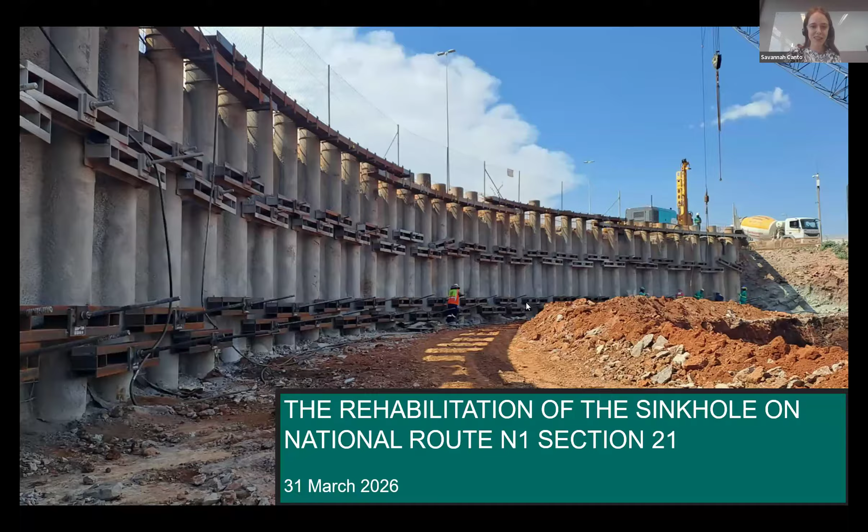Thank you. Morning everyone, and happy World Engineering Day and month. Today my colleague Anemi and I will be presenting on an interesting project that we were part of: the rehabilitation of the sinkhole on the N1. We'll go through the background and design solution for the project, then take everyone through the construction process and describe how incorporating technology led to a very efficient design and construction process.

First and foremost, we'd like to acknowledge and thank everyone involved in making this project a success. Firstly, our client, SANRAL, thank you for the opportunity to work on this project. Then to the design and site supervision teams at Zutari, as well as the contractor, Jordan Construction, and the geotechnical subcontractor, Terra Strata. A huge thank you to CESA for letting us present today, and to the CESA Aon Engineering Excellence Awards for selecting our project and providing a wonderful platform for consultants to showcase their projects.

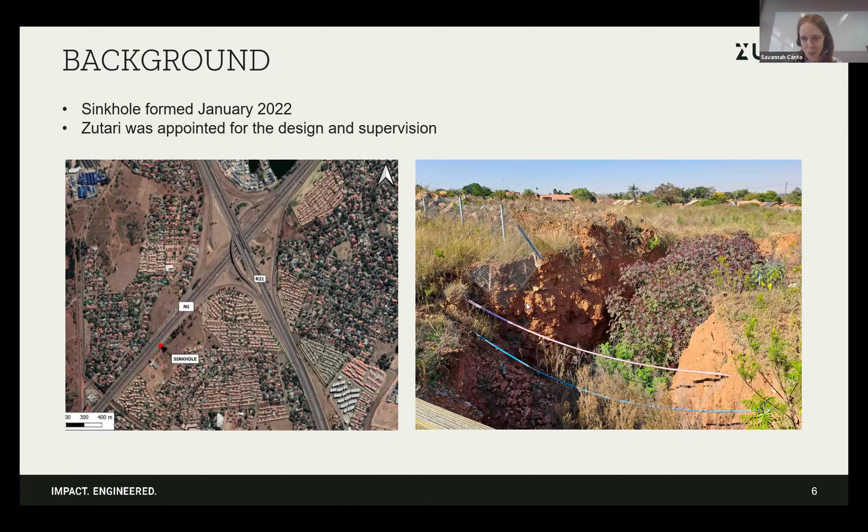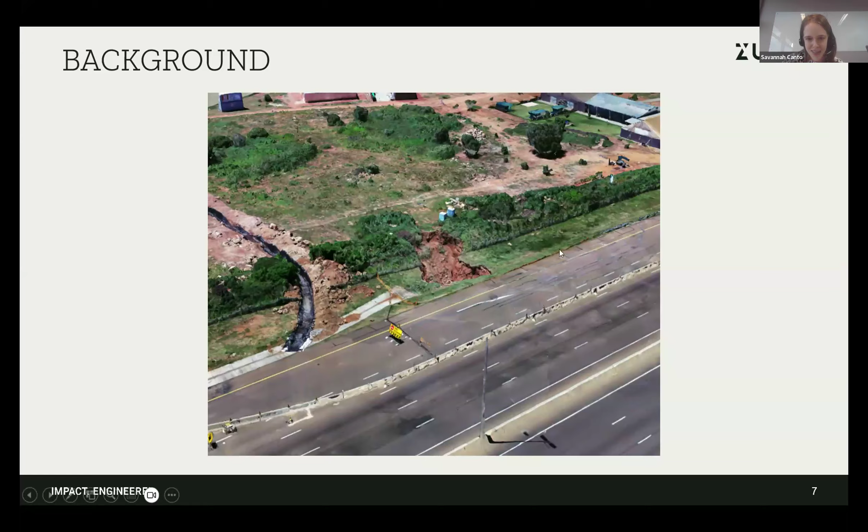Firstly, some background on the formation of the sinkhole. It formed in January 2022, just after the Flying Saucer Interchange on the verge of the N1. Zutari was responsible for the design and supervision of a remediation solution. This shows some drone imagery of the sinkhole, and you can also see the wider crack pattern around it. Here are more images of the crack pattern surrounding the sinkhole on the inner two or three lanes of the highway.

We started with an initial geotechnical investigation to find out more about the ground conditions surrounding the sinkhole. Those mounds on the road are where percussion boreholes were drilled to obtain more information on the ground conditions. These showed very poor subsurface conditions with a lot of cavity areas. One thing was that we couldn't do any excavation or investigation too close to the sinkhole because it wasn't safe to access at this stage, so our investigation was limited to the surrounding area that we could access.

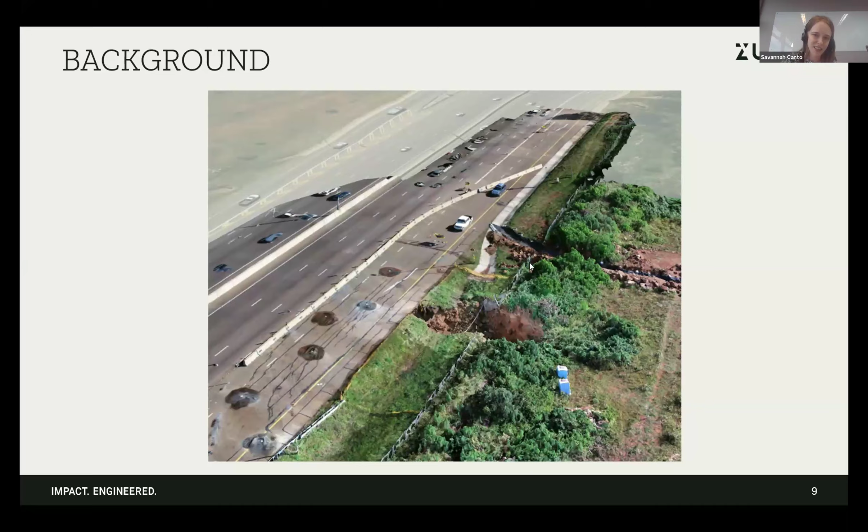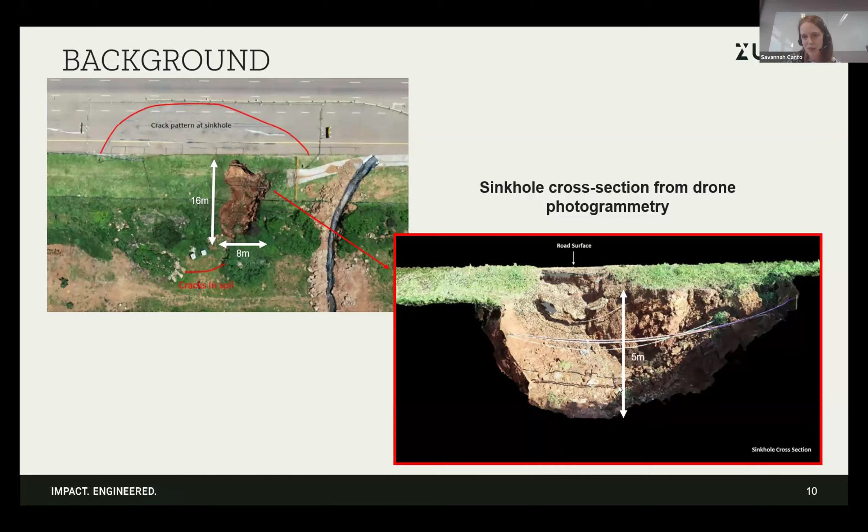Between Centurion and along the N1 and R21 route, there's a lot of dolomitic terrain. This is showing the location of the sinkhole in terms of the dolomitic geology in the area. The dolomite is all the blue on the map.

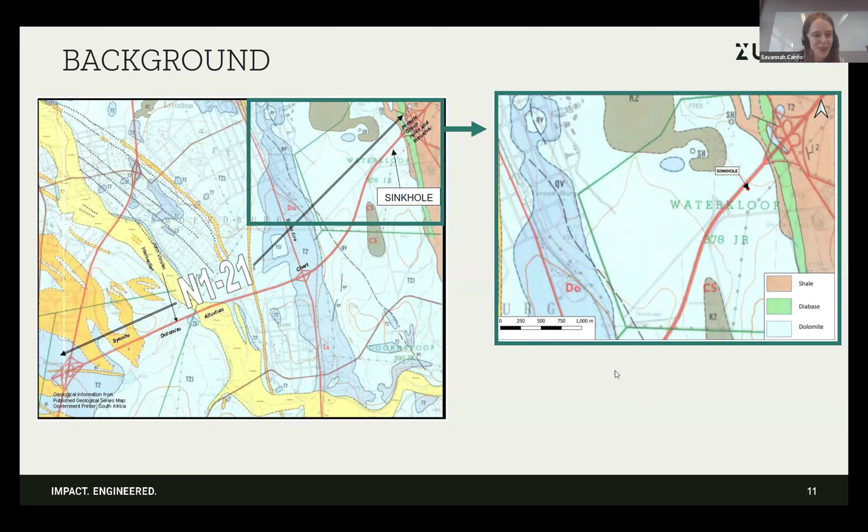This is just a brief introduction to sinkhole formation. They are formed on dolomitic terrain. What happens is that over many years, there will be cavities forming within the dolomitic bedrock due to dissolution of the dolomite from factors such as acid rain.

These cavities sometimes remain stable beneath the earth, but when there's a change, for example from lowering the water table and a pipe leaking or some leakage at the top that causes the fines above to wash into the cavernous areas, then the bridge of stable soil above basically gets eaten away at until it can no longer support the loads above, and then a sinkhole will form.

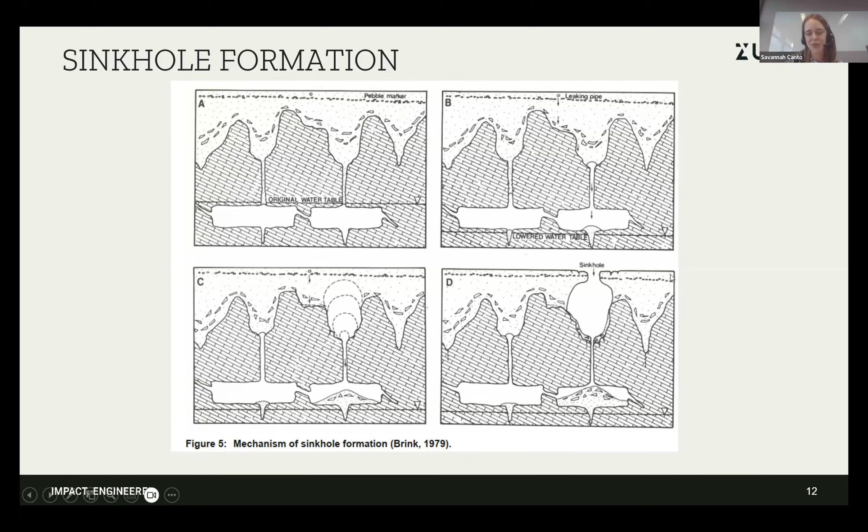So onto the design solution. There were basically two main solutions considered, or two aspects that were targeted. Firstly, we had to repair the immediate area of the sinkhole.

To do that, we needed to use a vertical retaining wall because it was important that the road remained open to traffic, and a full closure of the N1 would not have been economically feasible. So in order to keep some of the lanes running and save space, we couldn't do a battered excavation, and therefore we needed a vertical excavation.

The only way to achieve that was to install a piled wall surrounding the sinkhole, and then to excavate the sinkhole area and then plug the throat of the sinkhole.

That would involve drilling boreholes, which we chose to about 30 meters depth, and then pumping in a compaction grout mixture under pressure along each meter of that borehole to fill any voids or cavities underneath the highway.

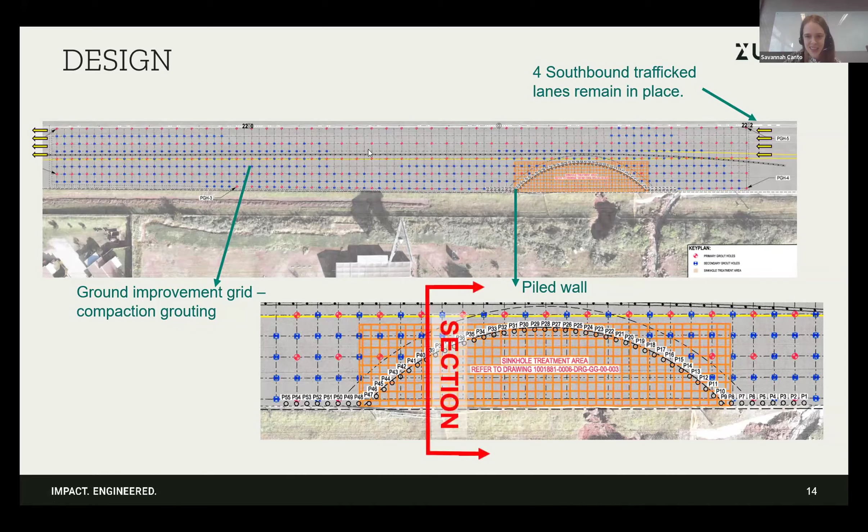The next slide will show a section through this piled wall. So here we can see a section through the piled wall.

For the piles, we used Odex piles. They're steel piles with a casing of 12 millimeters. These were selected because the dolomitic geology is very variable.

It's variable in terms of the depth to bedrock. The bedrock profile is very variable, and there will also be large boulders of dolomite, sometimes loose within the residuum, that need to be drilled through.

So the retaining wall was formed of these Odex piles that were installed to a depth of 25 meters. And then lateral support in terms of self-drilling ground anchors were used to keep the wall in place.

This allowed us to excavate in stages the sinkhole area. So how it would work is the piles were installed and then a row of anchors was installed with each excavated layer.

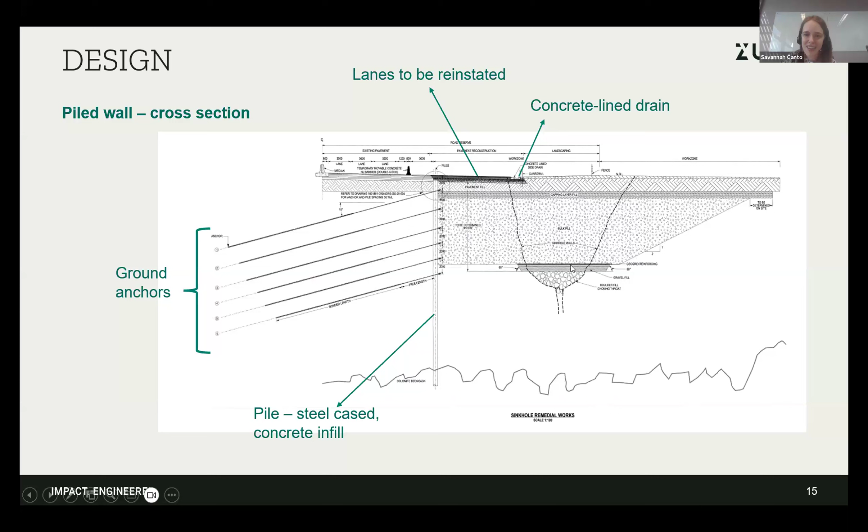Because of some safety concerns and more information that we received on the ground conditions while we were excavating, we deviated from the standard inverted filter method to repair the sinkhole and instead compaction grouted from within the excavation, which I'll explain in the construction slides.

And now over to Annemie to explain some of the traffic accommodation and pavement aspects.

Thank you, Savannah. So on the pavement slide, the roadworks involved the reconstruction of approximately 97 meters of primary pavement area, shown there in orange in the image, which had been significantly damaged by the sinkhole.

The excavations required for the sinkhole rehabilitation is indicated with that yellow hatched area. The primary objective in this zone was to remediate the sinkhole and provide structural support to the road throughout the construction process.

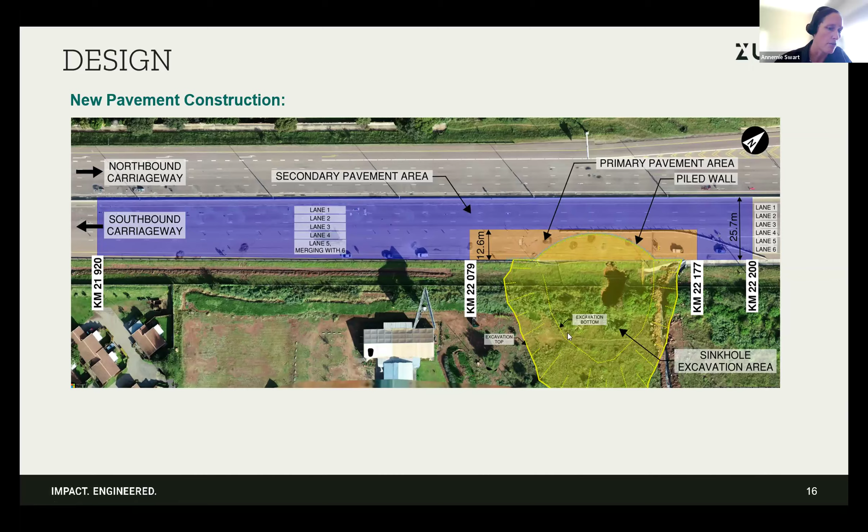In the secondary pavement area, indicated in blue, extending over approximately 280 meters, rehabilitation was required following the completion of the planned grouting works.

So on the next slide, this cross-section illustrates the proposed layer works within the primary sinkhole area, as indicated by that orange hatch in the top right image.

The red hatch in the cross-section highlights the temporary road widening required to accommodate the two-phase traffic accommodation plan.

The pavement reconstruction for both the sinkhole area reinstatement and the temporary widening comprise a natural gravel selected layer, a cement stabilized subbase layers, a bitumen treated base, and a 50 millimeter asphalt surfacing.

A glass grid geotextile was proposed between the BTB layers to promote a uniform riding surface and mitigate potential differential movement.

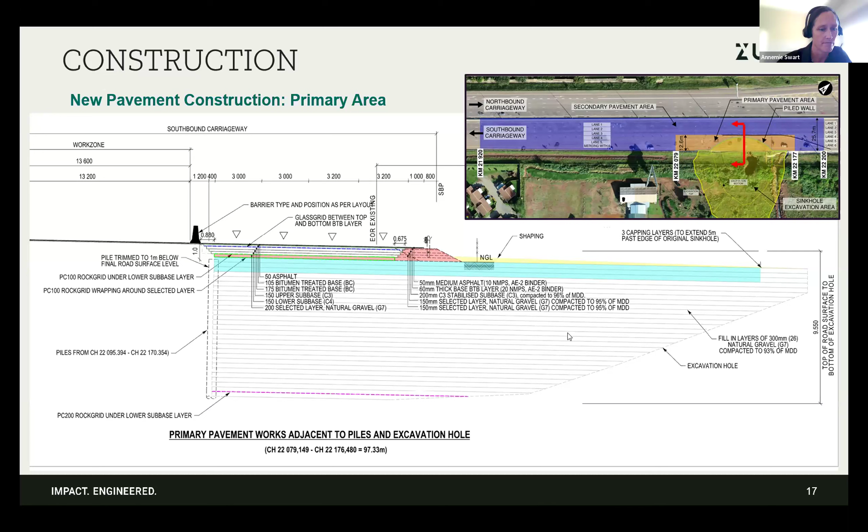Following completion of the grouting and sinkhole works, the initial plan for the secondary pavement area, highlighted in blue in the top right image, was limited to milling, crack repair and sealing with a 50 mil bitumen rubber gap graded asphalt surfacing, as reflected in this cross section.

However, grout-induced heave required a revision to this original pavement design. In this cross section, you can see the partial reconstruction of the pavement that we ended up with, including milling and crack sealing, followed by incorporation of varying thicknesses of BTB as required, reinforced with glass grid and a 50 mm asphalt surfacing layer. This approach restored both the structural integrity and ride quality of the affected area, while minimizing program delays and associated traffic impacts.

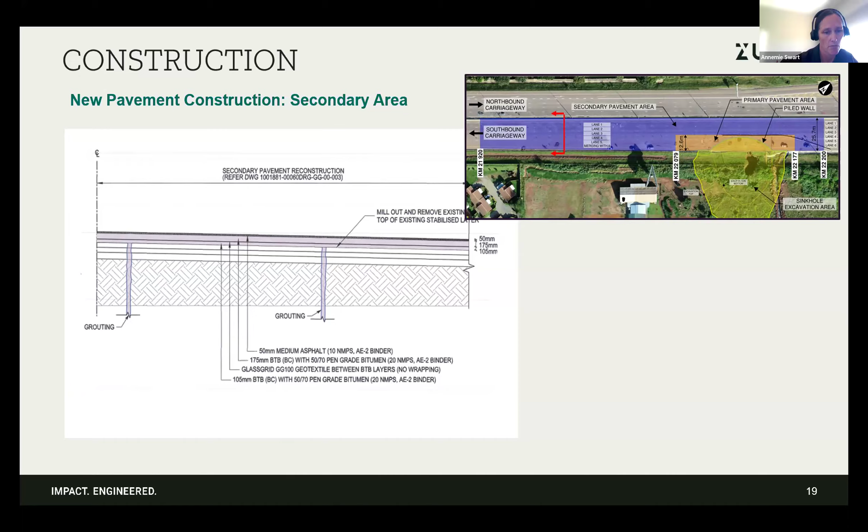Concerning accommodation of traffic, a two-phase traffic accommodation plan was implemented, comprising phase A outer and phase B inner work zones, so that 4 lanes remained open during peak traffic periods. This image shows the phase A work zone, with traffic accommodated on 4 narrowed inner lanes.

The only exception was a 2-week period during casting of piles closest to the traffic, where only 3 lanes could be maintained. This duration was reduced from a planned 4 weeks, representing a significant program gain of 2 weeks.

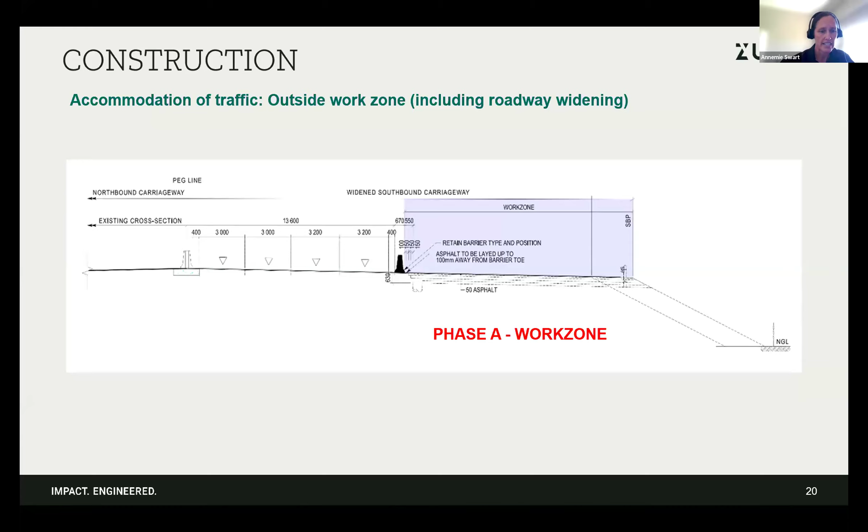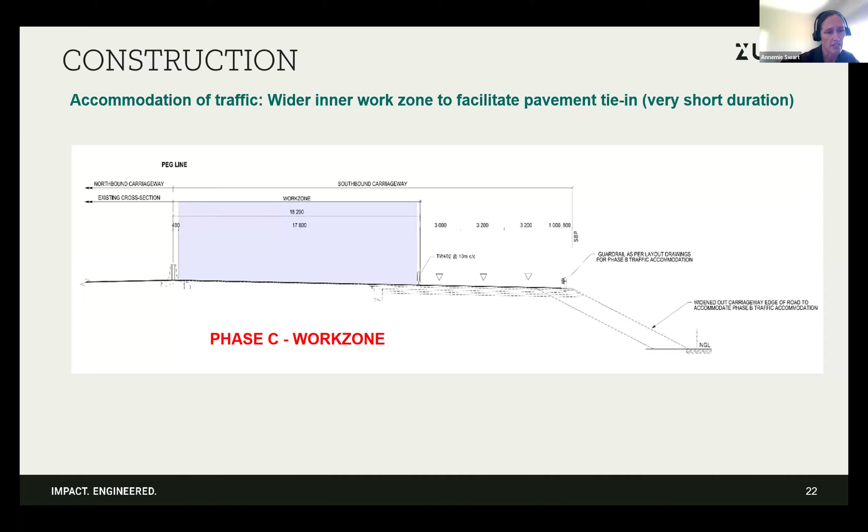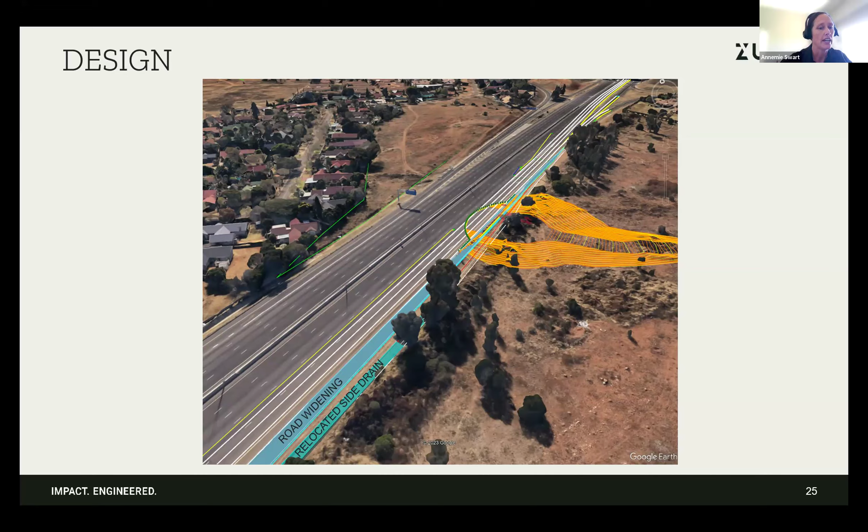Due to limited space on the southbound carriageway for the proposed traffic accommodation, it was necessary to temporarily widen the N1 southbound carriageway. This ensured the availability of 4 through lanes at all times during construction. The widening area is marked with a blue hatch, necessitating a slight realignment of the original gravel side drain, which was lined with concrete and integrated into the stormwater system located further downstream.

That brings us to a couple of slides we'll share on the construction, and Savannah will first take us through some of the geotechnical slides. Thank you, Savannah.

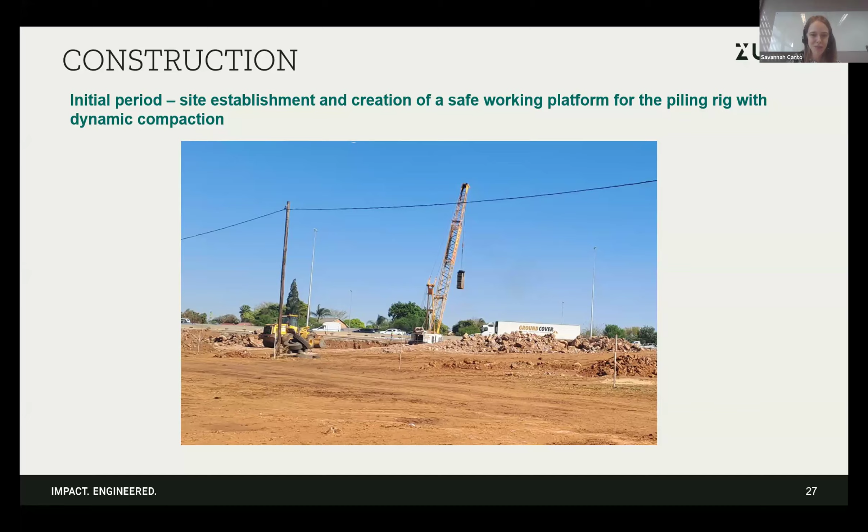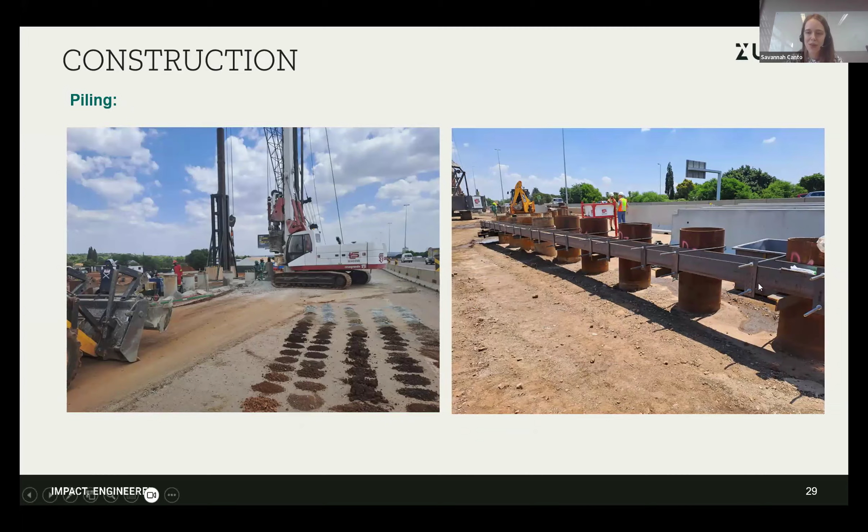With each meter of piling, a sample was taken from the drilling, and that sample was logged to give us a picture of the geological conditions we would see as we unearth the excavation. All the piles were tied together at the top with the strapping beam you can see on the right-hand side image.

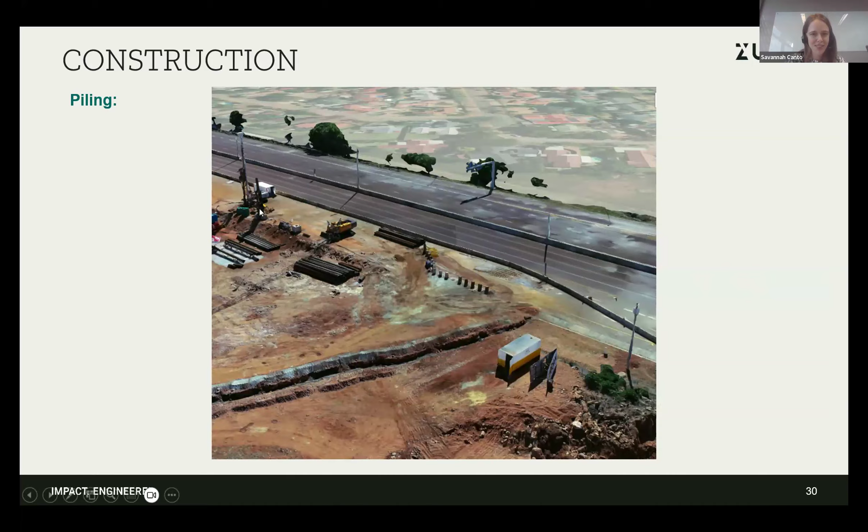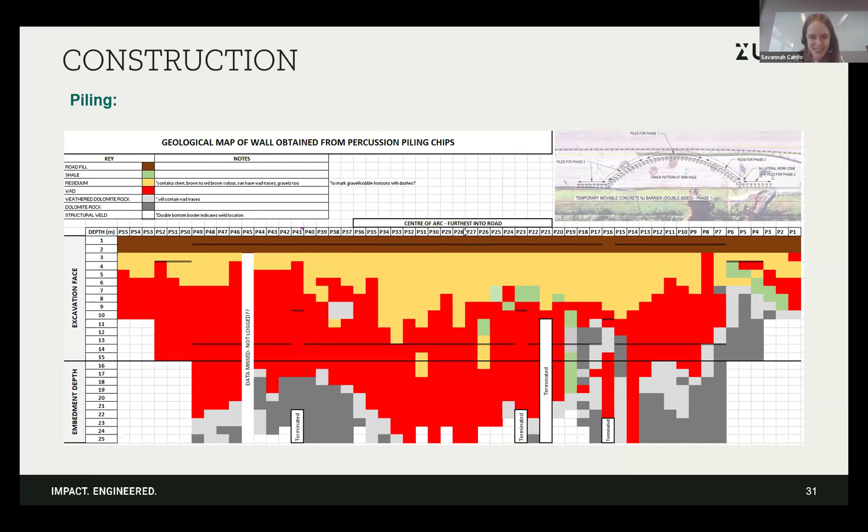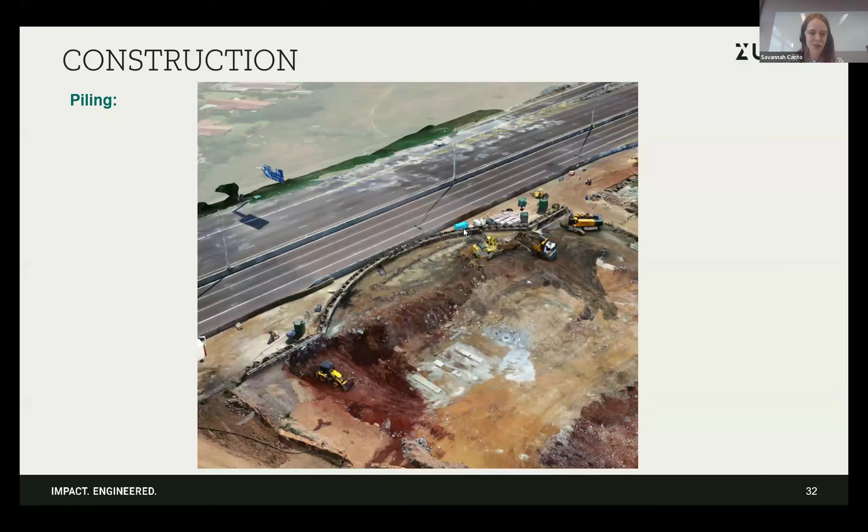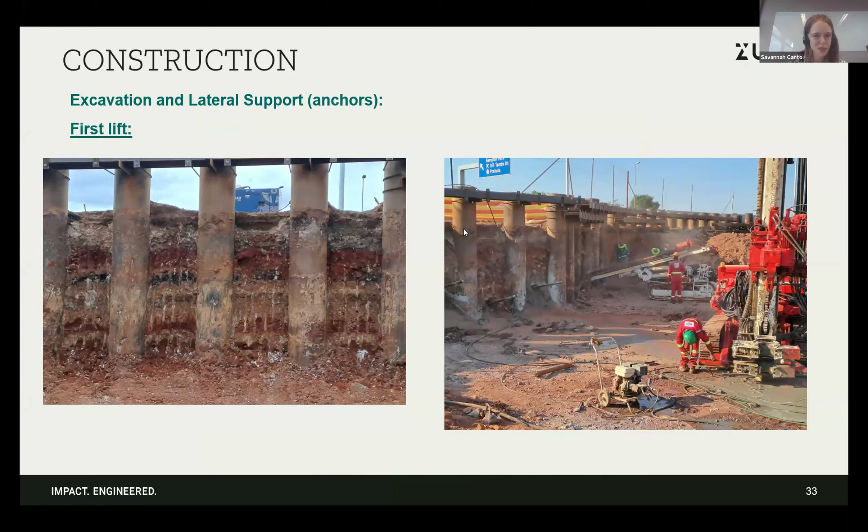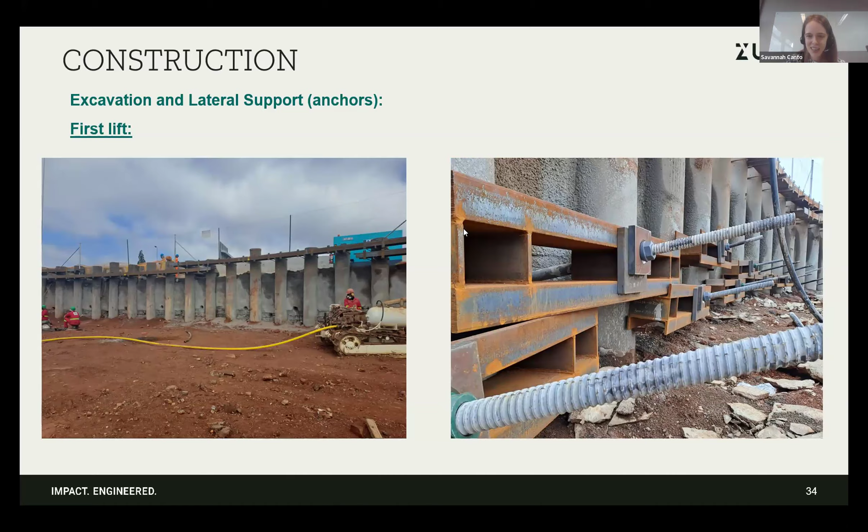And there you can see in the left image the road layer works, which was mostly the fill material for the road. Then the left image shows the shotcrete that was applied to the face, and on the right-hand side you can see the anchors that have been pre-stressed.

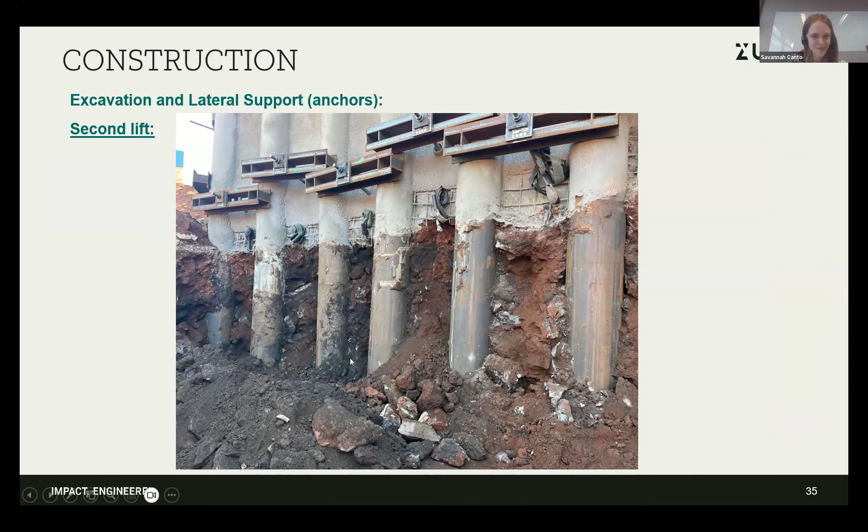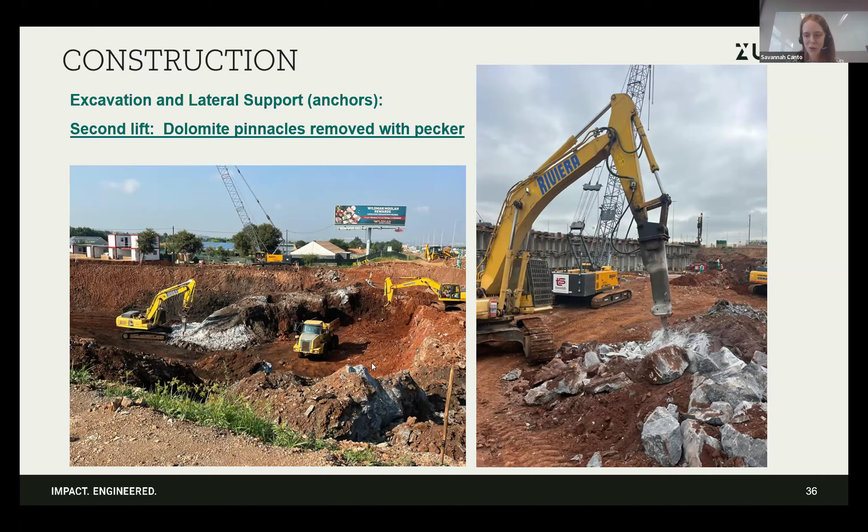Here are some views into the excavation. You can see the variability in the dolomite profile. There were some pinnacles unearthed in the excavation, which posed some challenges because dolomite rock is extremely hard. So we left them in place where we didn't need space to work, and where we needed space, we had to either peck the rock away or drill it to weaken it and then remove it.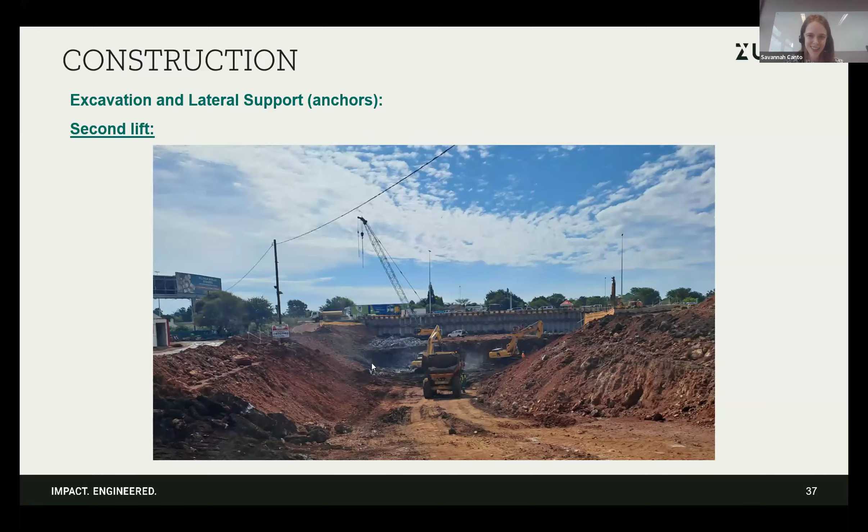So this is once the second lift had been completed, a view into the excavation. Also a view from a ramp at the top. You can see how close the cars or the highway is in the background.

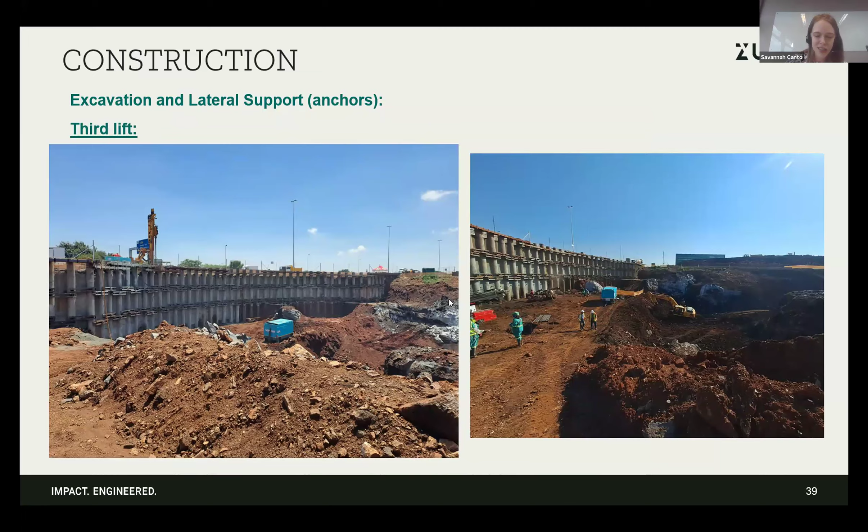Here are some images from the third lift where you can see more pinnacles being unearthed in the excavation. And there on top of the road, you can see one of the drilling rigs for grouting on the road surface, busy drilling a borehole.

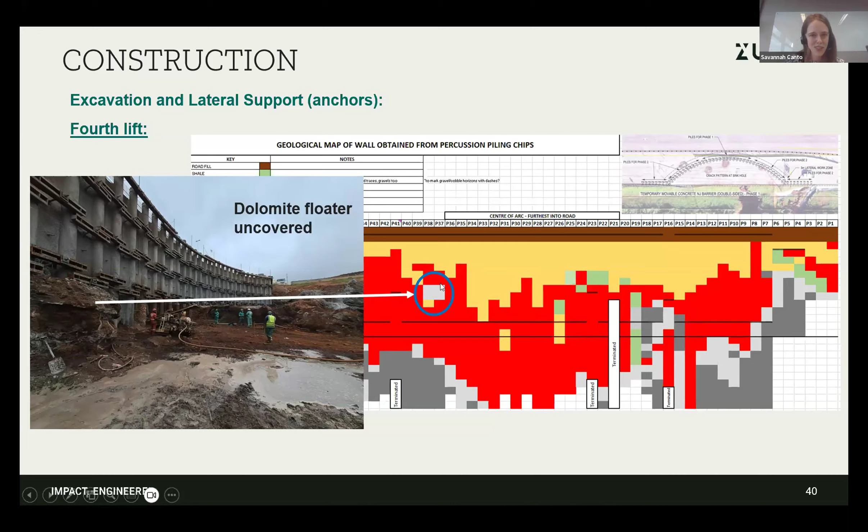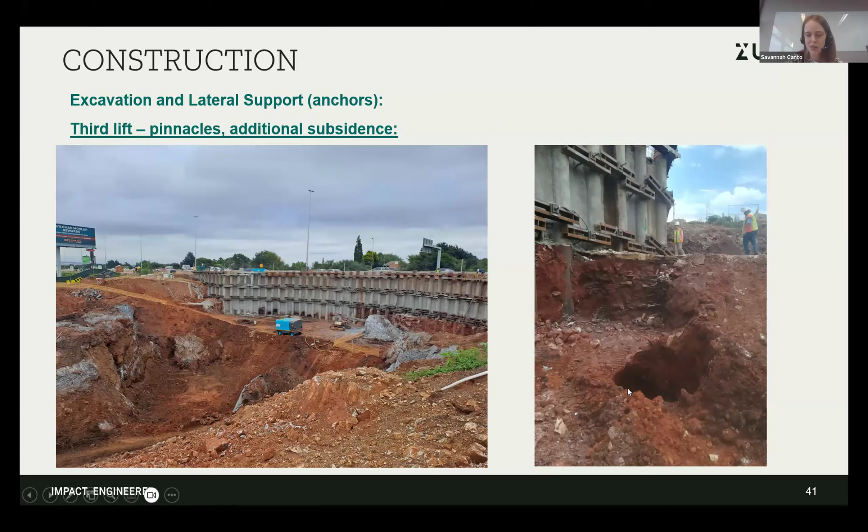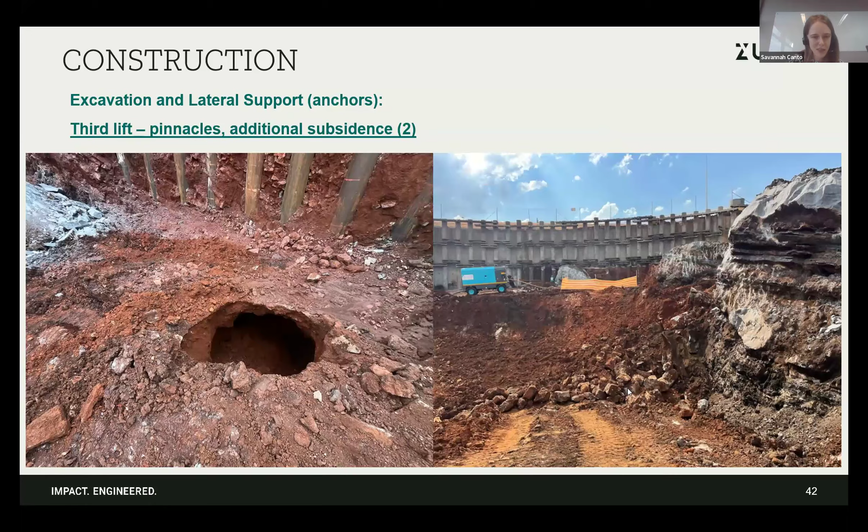So here's some more pictures of that subsidence. Once that was filled, we continued with another lift in the excavation.

And once we got to the fourth lift, we also started seeing some of the grout from the road sometimes enter the bottom of our excavation. So that gave an idea of how interconnected the karstic pathways were beneath the ground.

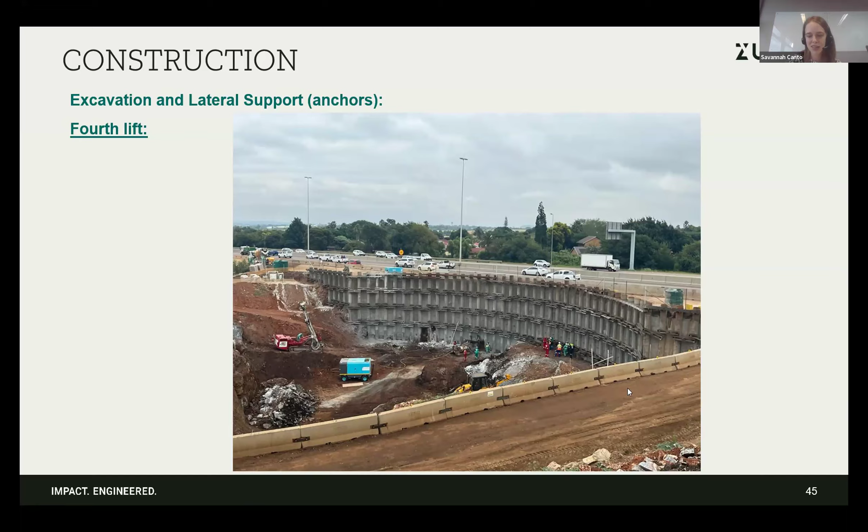So we became concerned about the ground conditions beneath us. So we ended up doing some exploration drilling within our excavation area to get a better idea of the ground conditions. And this revealed quite extensive cavity areas below the excavation and also a deeply weathered feature below the initial sinkhole area.

This was likened to be the origin or the source of the sinkhole where all the stable soil had washed into. So upon seeing that, instead of excavating further and trying to choke the throat of the sinkhole, it was decided to instead do compaction grouting from within the excavation floor to fill up any voids and cavities beneath the surface, and in essence choke the throat of the hole through compaction grouting.

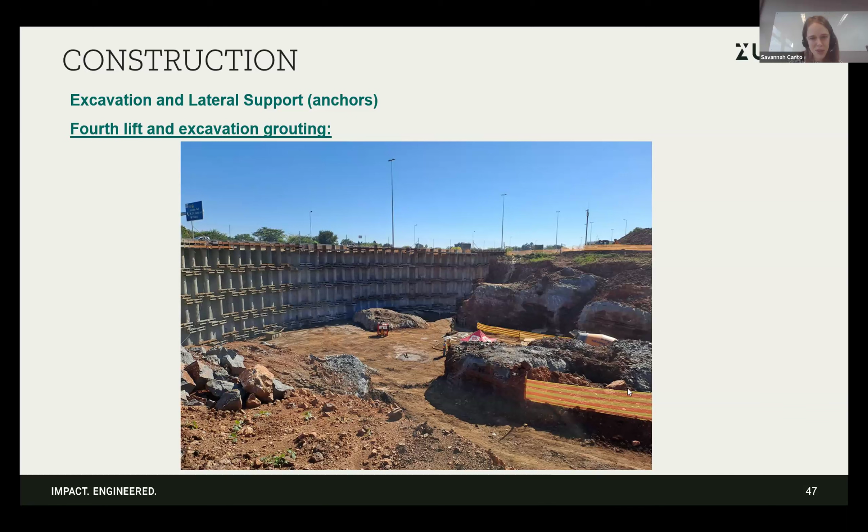So these are some images of the grouting operations within the excavation.

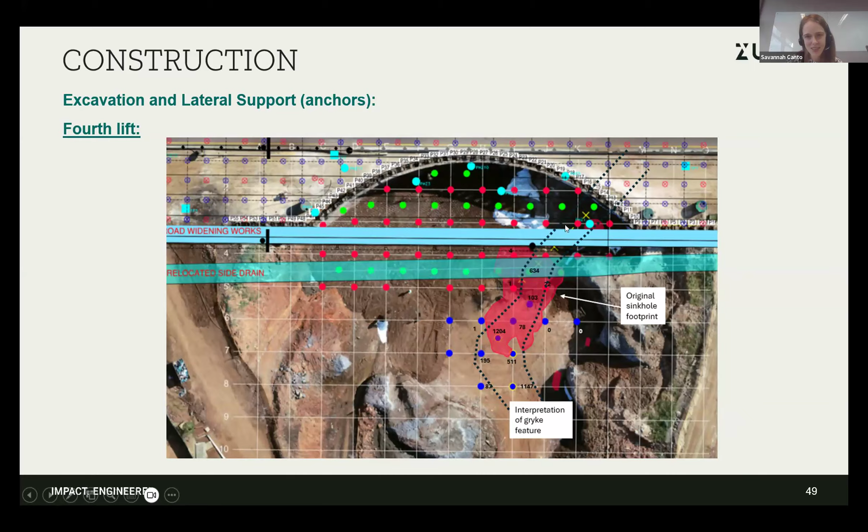Here's some more images of grouting within the excavation. This summarizes the largest intakes of grout we had beneath the sinkhole zone. To emphasize how much it was, an Olympic swimming pool has a volume of 2,500 cubes, and that's almost as much as went into these three holes highlighted in yellow. So that just shows the extent of the problem that was existing there.

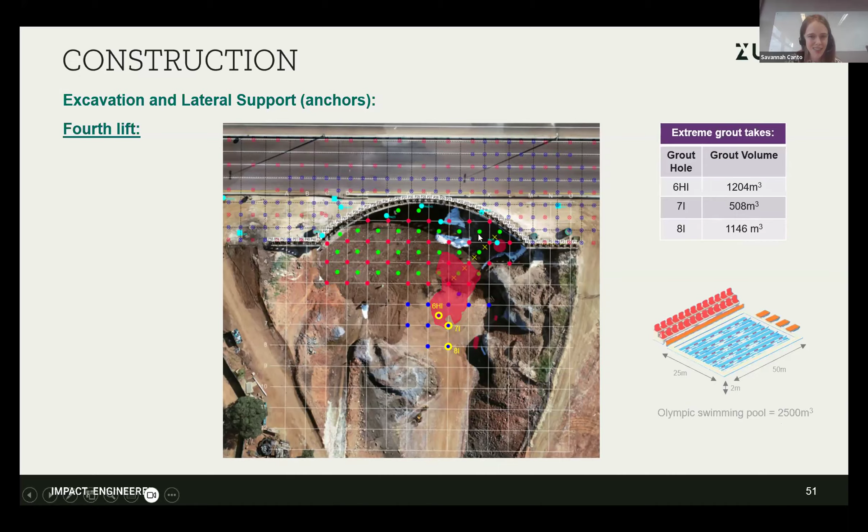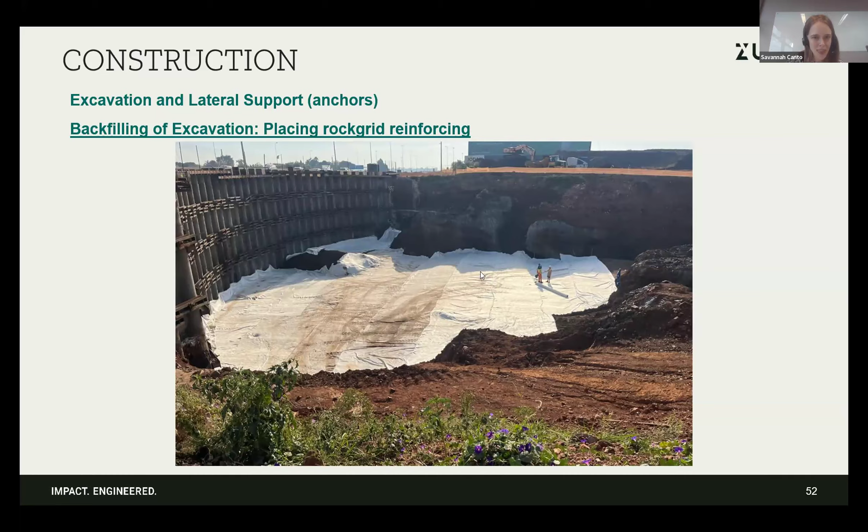Once we were satisfied that it was sufficiently grouted, we applied geotextiles to the base of the excavation to ensure that the platform would be stable to build up on and for extra support and stability for the future. We could then fill the excavation with engineered fill so that the roadworks could be reinstated. These are just some pictures of the filling exercise.

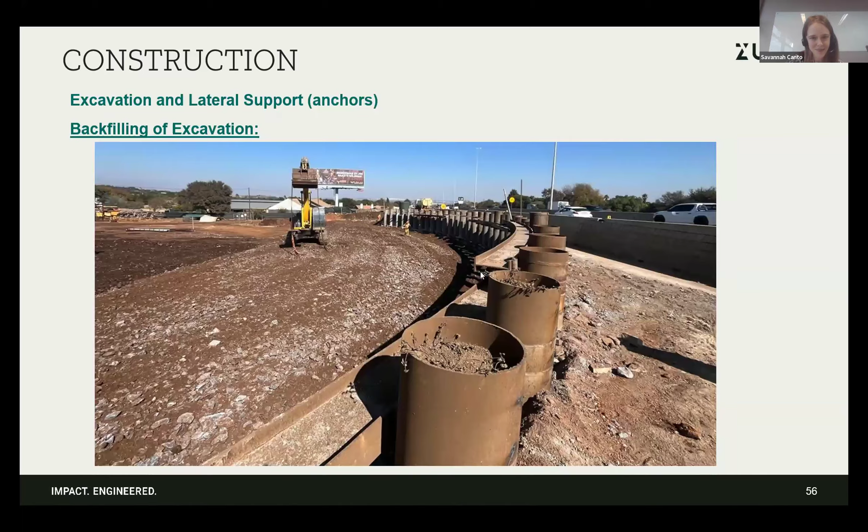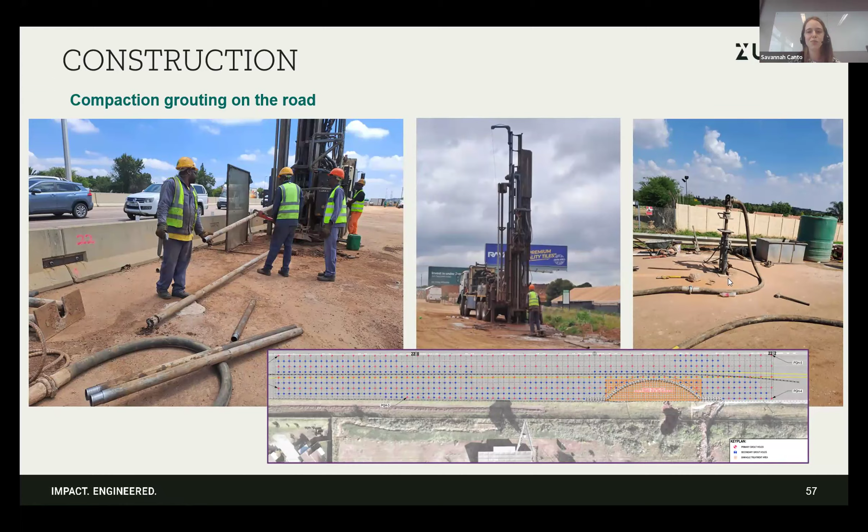While all that was happening, there was ongoing compaction grouting occurring on the road. This shows the drilling of the boreholes and then the grouting apparatus. For the compaction grouting on the road, it would be a 30-meter hole that was drilled and then a casing was installed. Every meter, grout would be pumped in under pressure until certain cutoff criterion in terms of the pressure or the volume of grout were reached.

We would keep track of the grout intake at each borehole and work with the contractor on deciding which secondary boreholes would need grouting. Initially a primary grid was done, and then where grout takes were large, additional boreholes were drilled and grouted at a split spacing within the primary holes.

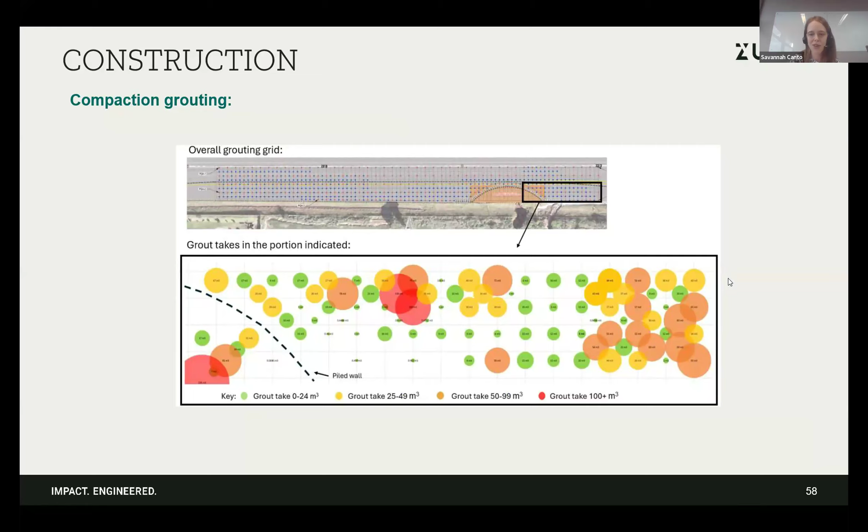And now Annemie will take you through some of the challenges experienced during the grouting.

Thank you, Savannah. The compaction grouting on the road caused unforeseen challenges in some instances, where the grout resulted in heave on the N1 traffic surface. Ground heave incidents resulting from the grouting operation were managed through a combination of risk workshops, temporary lane closures, and prompt milling and patching interventions, as shown in the image to the far right. The image on the left shows an example of a visible crack that developed in the outer work zone due to those grouting exercises.

Another example is the 110mm high bump that formed in the southbound carriageway due to ground heave, visible in the middle image. To mitigate the risk to the travelling public, it was very important to implement daytime slow lane closures outside of peak traffic hours to minimize the potential impact of any future heave on traffic.

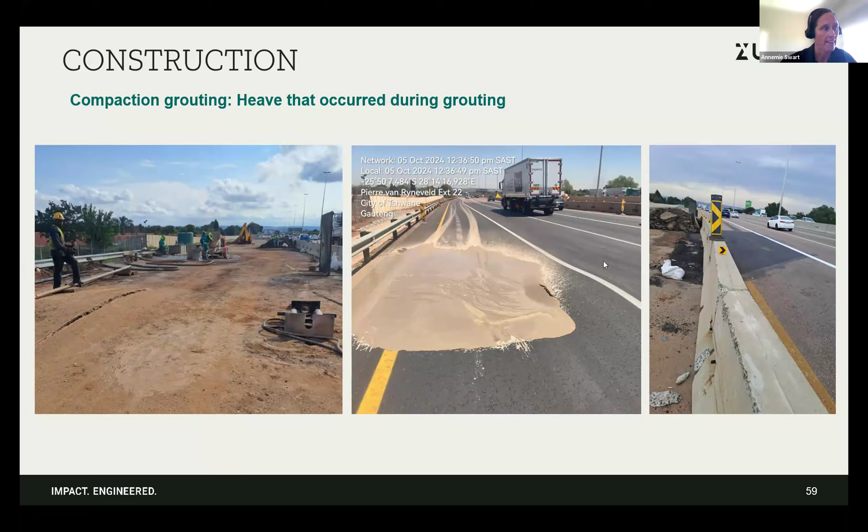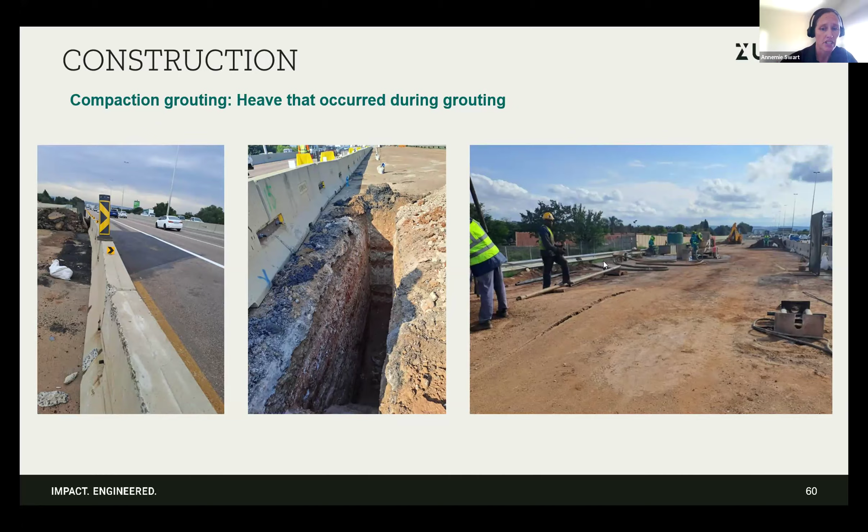The next slide summarizes the complete grouting works, including the total grout volumes used. When combining the volumes for phase A, phase B, and compaction grouting within the excavation, the total grout volume equates to approximately 9 Olympic-sized swimming pools using our Olympic swimming pool comparison. That is also equivalent to around 3,800 concrete mixed truckloads of grout.

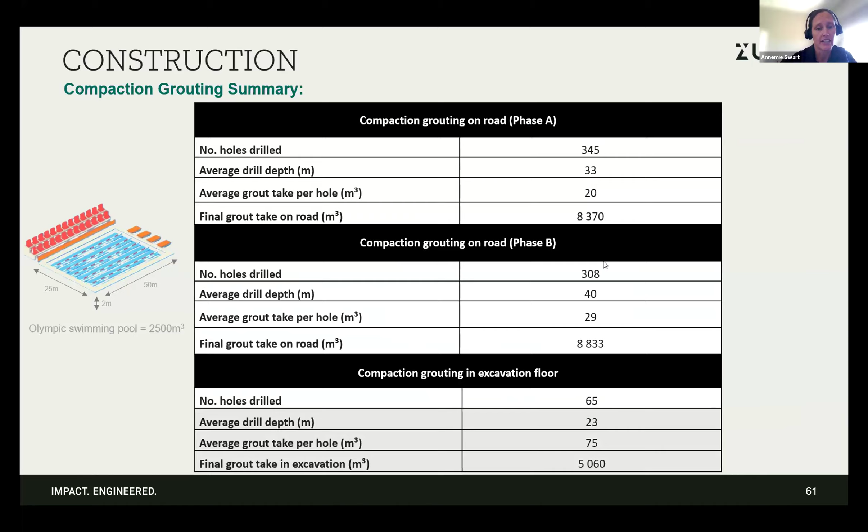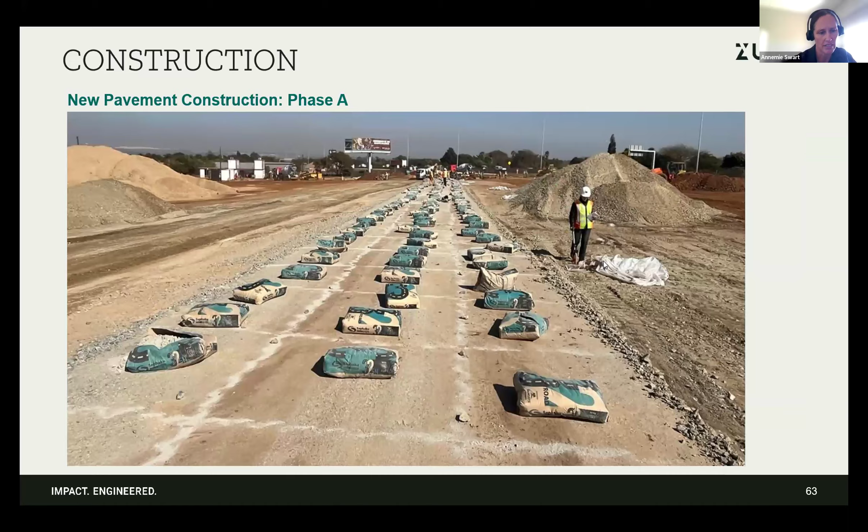The following images illustrate pavement and roadworks construction activities carried out during phase A, following the repair of the sinkhole. These images show the mixing of the cement stabilized material, and the following slide shows preparation for placement of the sub-base layer.

These images show pavement rehabilitation for the section over the excavation hole and the temporary road widening. A cement stabilized sub-base was installed in both areas. In the image to the right, the grader is spreading and shaping the cement stabilized material, trimming the layer to the correct levels and crossfall, and preparing the surface for compaction.

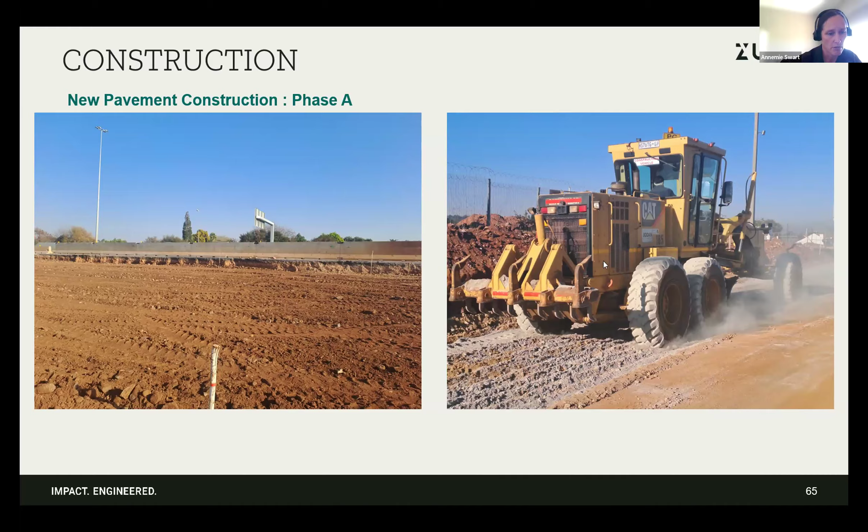Bitumen-treated base layers have been placed with coring undertaken to verify in situ density and layer integrity. Hamburg core samples were extracted for performance testing. A glass grid geotextile GG100 was installed between the BTB layers to provide reinforcement and mitigate reflective cracking.

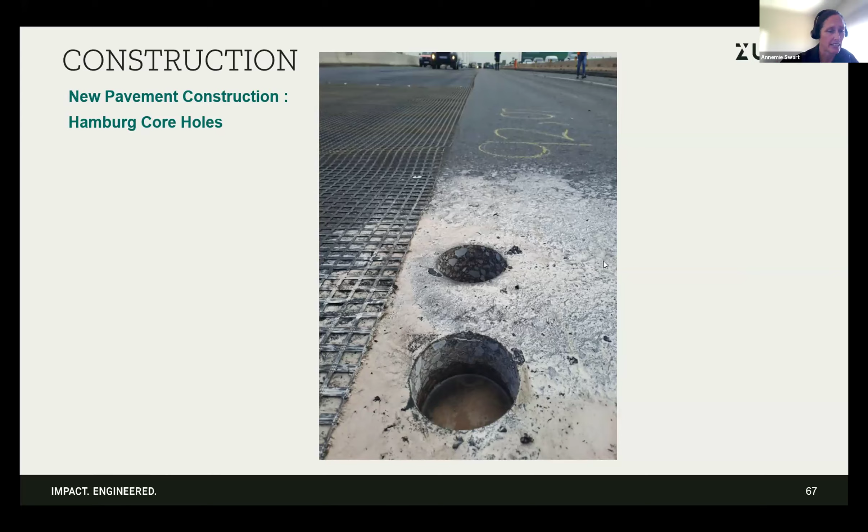Asphalt construction is in progress over a pavement structure comprising bitumen-treated base layers with a glass grid geotextile installed between the BTB layers. To expedite the construction program at SANRAL's request, the originally specified G1 base for the primary pavement area, where the sinkhole rehabilitation was undertaken, was replaced with a BTB base and medium asphalt surfacing.

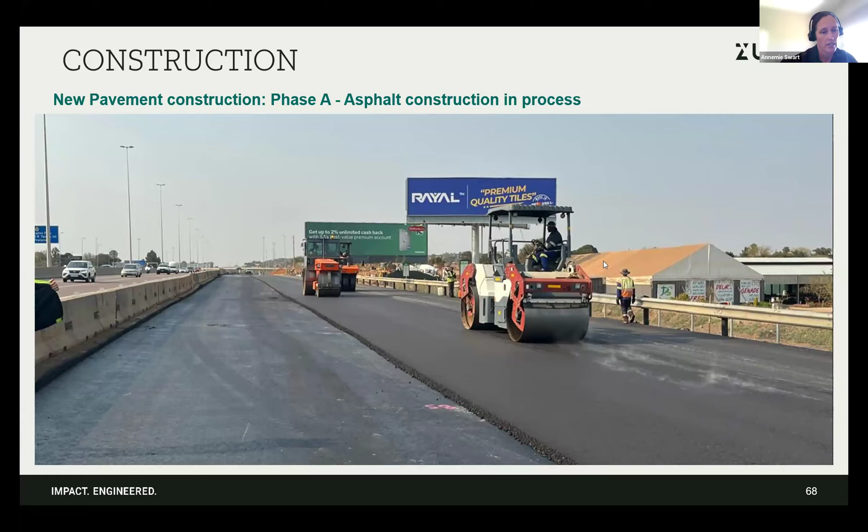This was followed by the application of pre-coated chips onto freshly placed asphalt surfacing to enhance surface texture and skid resistance, followed by rolling to ensure embedment.

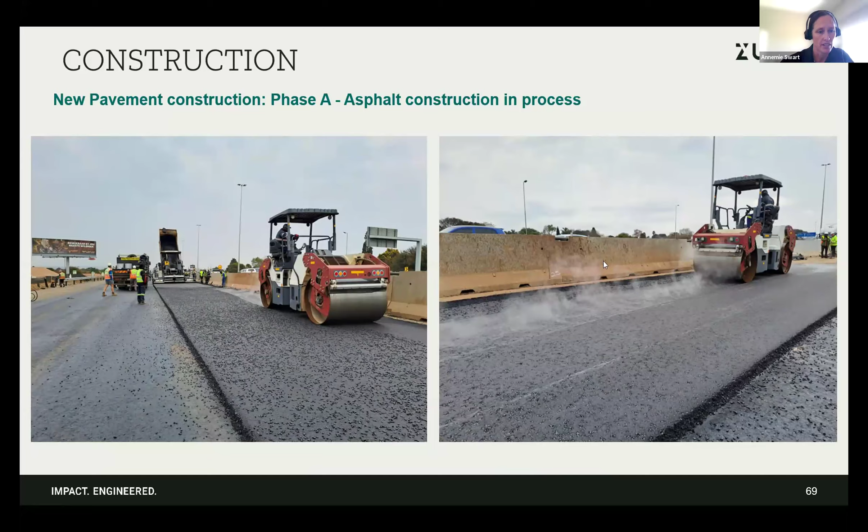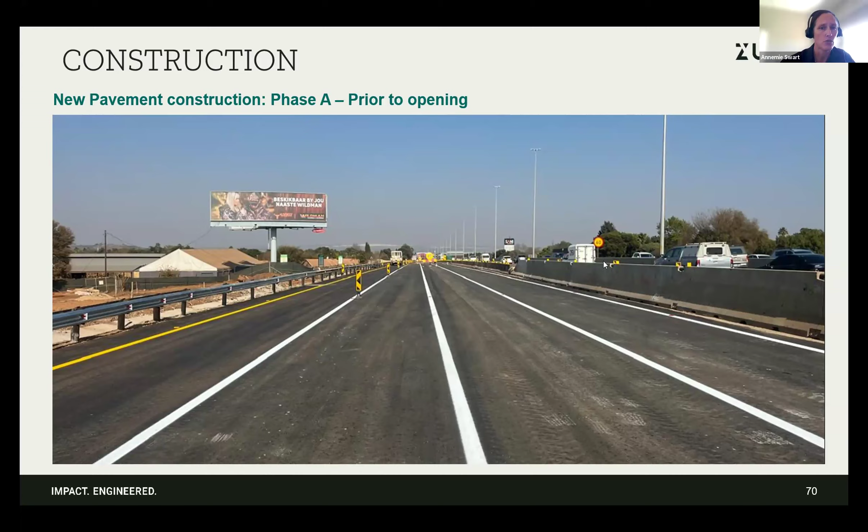The next slide shows phase A prior to opening and just prior to moving over to the inside lanes, which is the phase B work zone. So here you can see the phase B work zone.

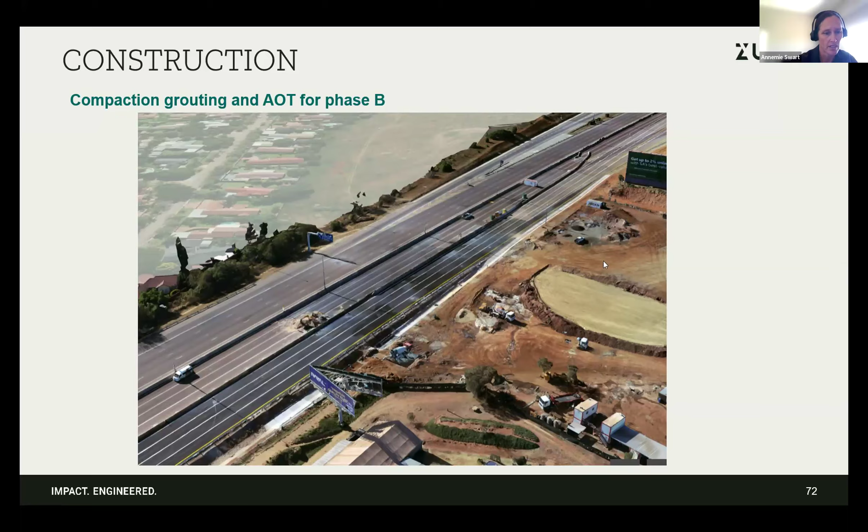After completing grouting and pavement rehabilitation in that outer work zone, the grouting process proceeded in the inner work zone, and you can see them starting to work there.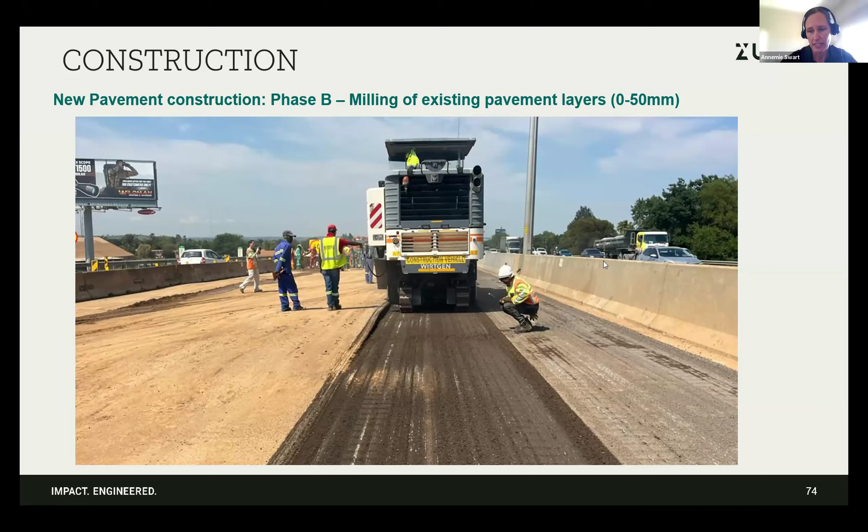Night works were also implemented to maintain a tight construction program. Then milling from 50 to 150 millimeters is shown on that slide.

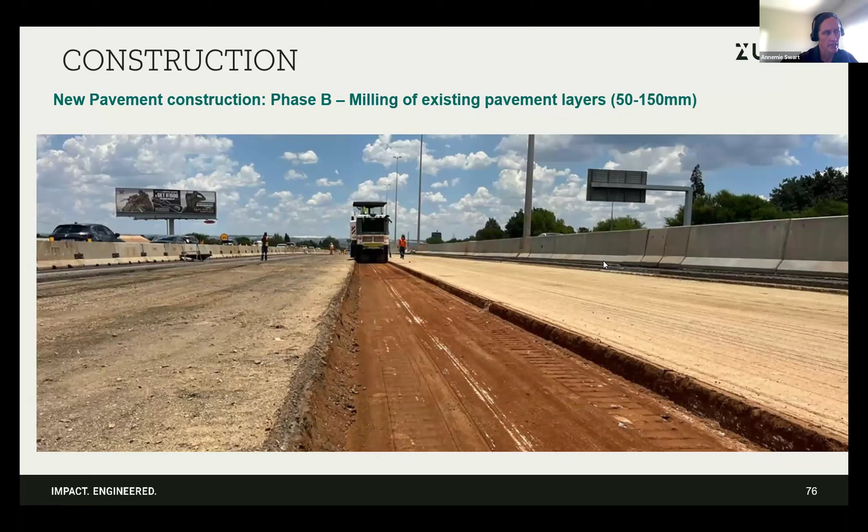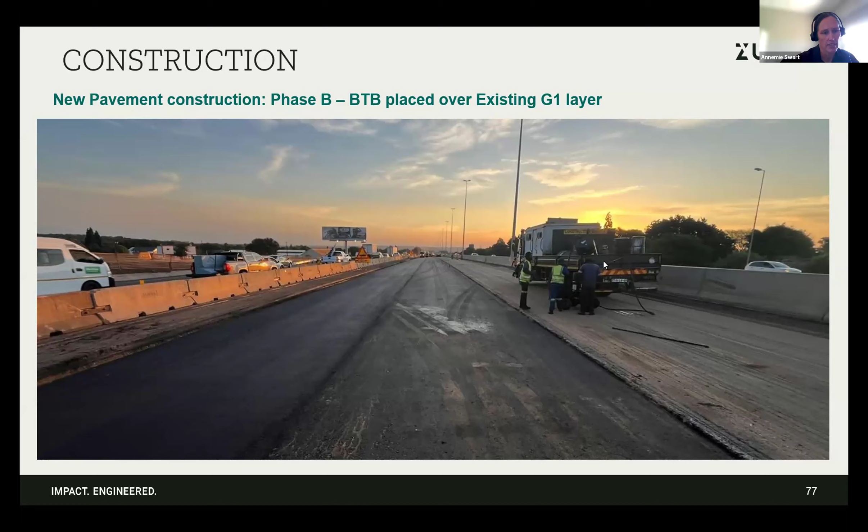BTB was placed over the existing G1 layer. The next slide shows... sorry, the slides are jumping around.

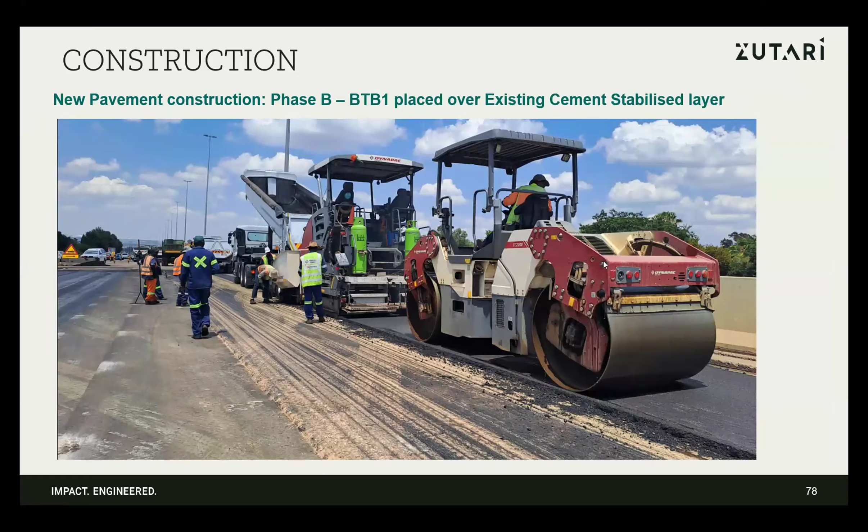Yes, that's just the BTB layer over the existing cement stabilized layer. Then a glass grid geotextile and second BTB layer were placed over the existing cement stabilized layer.

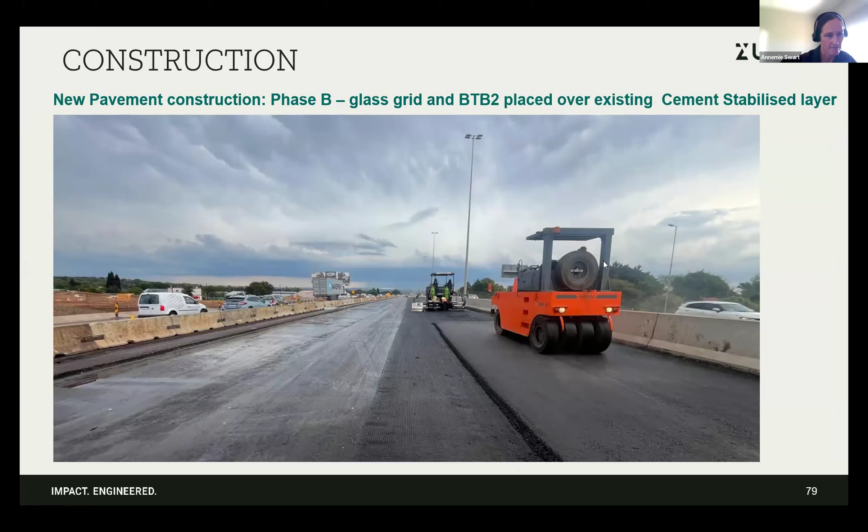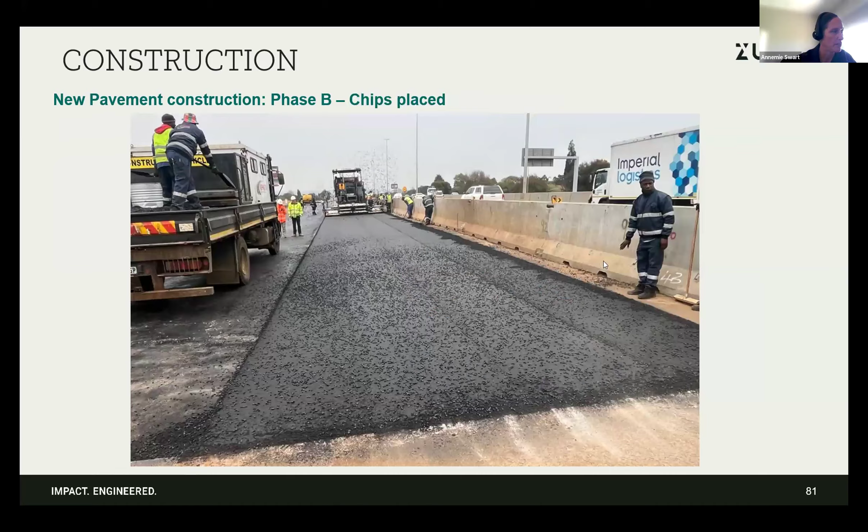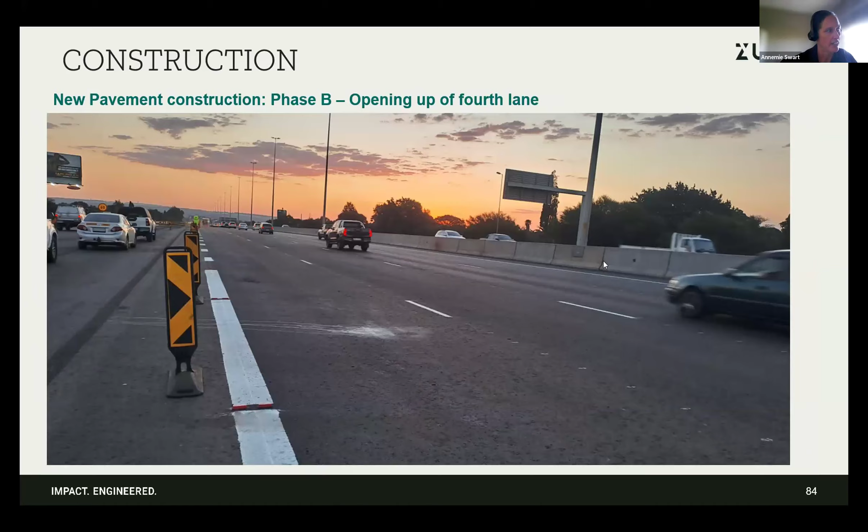Then the opening of the first two lanes, followed by the opening of the fourth lane, and finally on the last slide of the construction photos.

After 12 months of construction compared to the original 24-month program, the road was successfully opened to the public, where the contractor not only met but significantly exceeded their CPG targets. So that's all the construction photos.

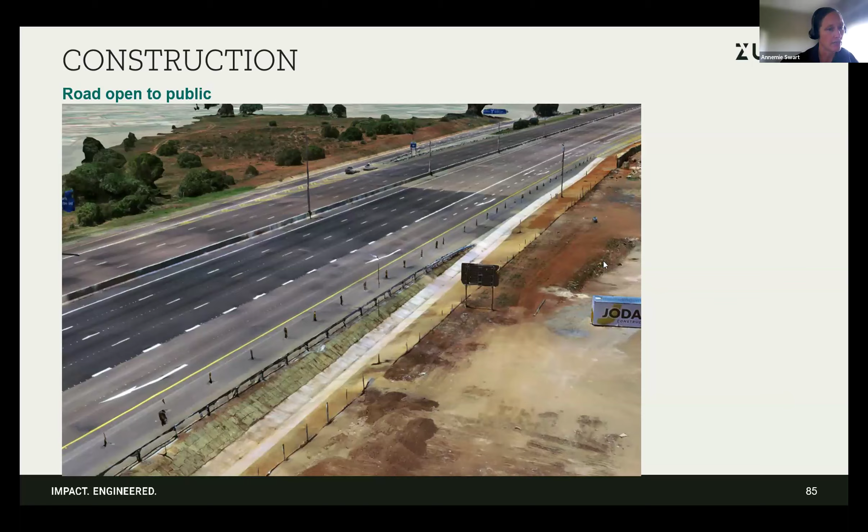I would quickly like to dive into some of the technology that was incorporated into this project.

We'll stop sharing so you can access it. Be there in a minute, thank you. Can you see my screen? Not yet.

Yes, we can see. Incorporating technology: the use of advanced technology played a critical role in the effective planning and management of the project. As part of our design approach, we actively integrated advanced technologies to enhance understanding of site conditions and inform engineering decisions.

In this project, the gravimeter was utilized during the initial phase to provide valuable insights into the underlying subsurface conditions.

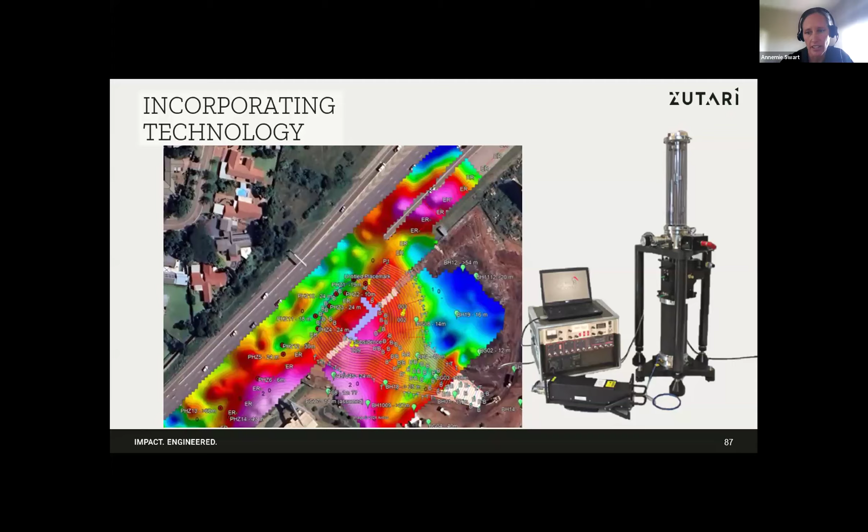Zutari's advanced drone survey equipment played a crucial role in supporting on-site design and decision-making by facilitating accurate quantity verification and providing high-resolution survey data to support informed on-site design decisions.

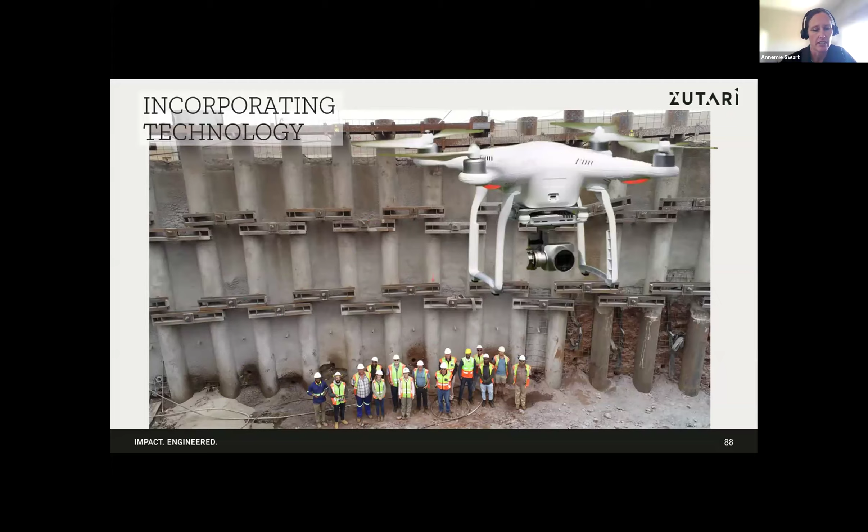The drone imagery was also hosted on a GeoVerse platform, enabling the creation of 3D snapshots in time at various stages of the project. This proved invaluable in numerous instances for tracking progress and supporting decision making.

Before we proceed, I would just like to quickly share this GeoVerse. Oh, I see it closed on this side. I will get it up before the end of this slideshow.

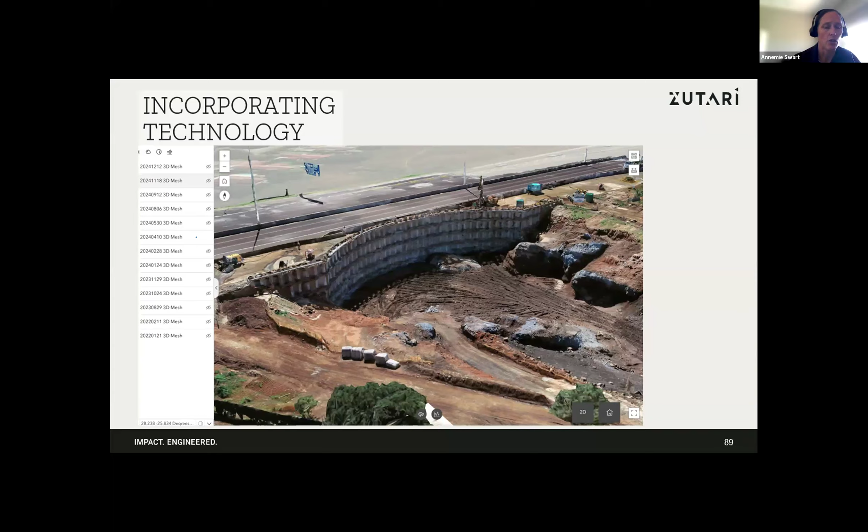Each and every of these dates presents a 3D presentation of the drone footage that has been taken, and you can literally in 3D move to any point on that site, which was really very valuable.

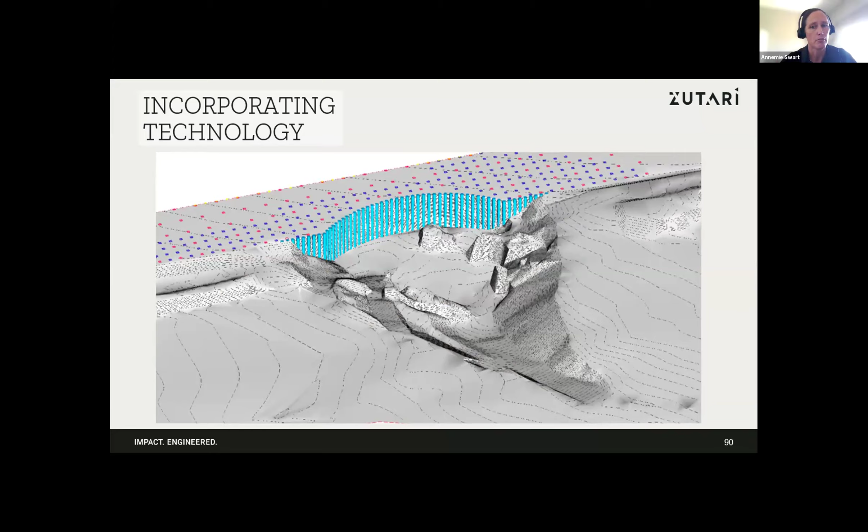Last, 3D modeling and PDF creation proved highly effective in visually communicating specific areas for discussion and decision making to produce a workable, resilient solution.